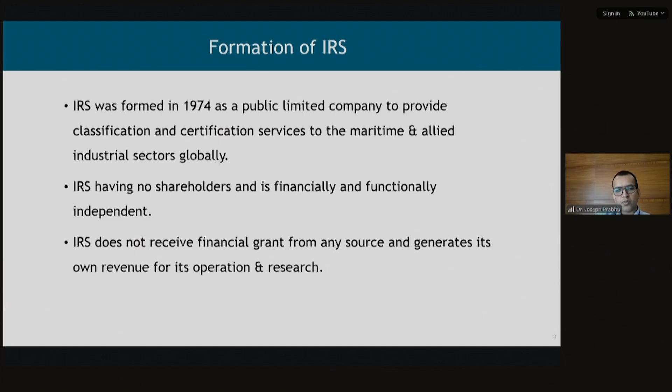We have some recognition from Indian administration, so we can assign load lines to our ships, both Indian and other country flag vessels. We can carry out audits on ships and ports in accordance with international safety and international ship and port facility codes, checking whether ships are sailing as per regulations, pollution norms, and everything else. We have 53 global offices, 26 outside India, and in India we cover almost all the ports.

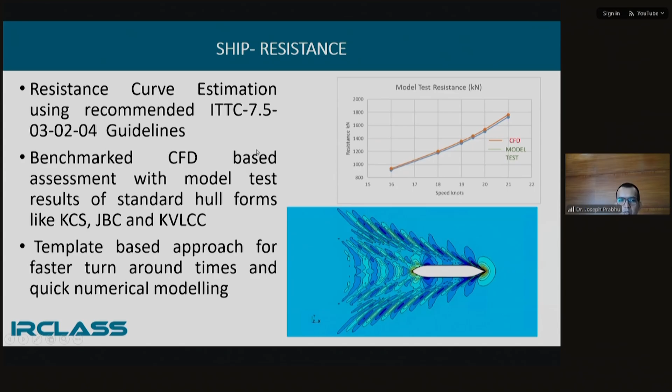What is the resistance? We will have more benchmark studies like model tests, and based on that we validate our CFD results. There will be template approaches for that. We follow ITTC - International Towing Tank Conference - guidelines, including domain dimensions; how much domain we need to take is given by ITTC, so we can follow that easily, ready-made.

Now open water efficiencies, as I already talked about some things - we keep behind the hull removed from the ship and just rotate the propeller. This will be single phase, only water, fully submerged, and we rotate the propeller and compute the thrust, torque, and the efficiency of the propeller.

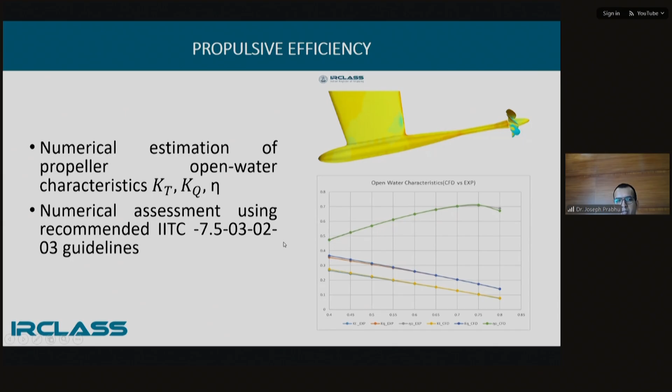Rigid body method and moving reference frame, MRF and RBM. In RBM, we physically rotate the propeller and compute the forces, then transfer that force to the hull, and the ship keeps moving to overcome the drag. In MRF, moving reference frame, we keep the propeller static and make the flow around it, with fluid particles rotating in that domain.

So these are two techniques. MRF approach gives quicker results and is computationally less expensive, but the RBM technique is time consuming and computationally more expensive. So for simple cases where geometry complexity is less, we go with RBM, since RBM is more accurate. Where accuracy doesn't matter, we go with MRF.

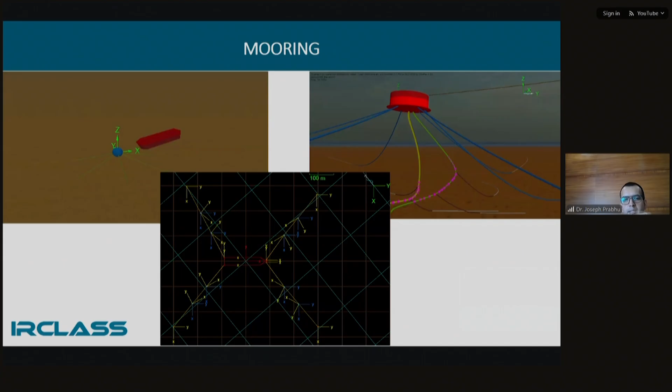Then these are the mooring analyses, which we do in Moses to compute how floating platforms should be moored. When ships need to be in static operations, mooring analysis is done and tension in the mooring lines needs to be checked using Moses. Then we already discussed a little about radar cross sections.

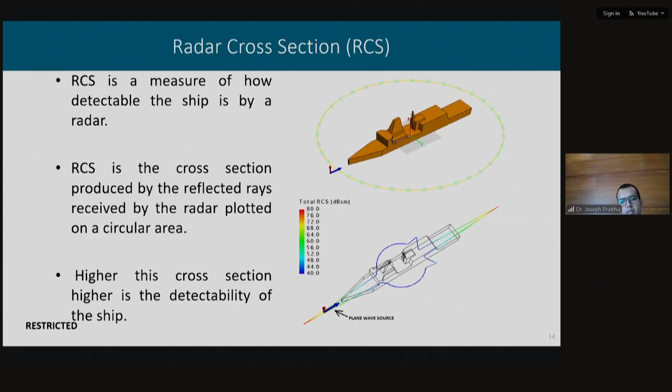This is normally applicable for naval vessels. We need to make the ship less exposed, it's a measure of how detectable the ship is by radar. RCS is the cross section produced by the reflected rays received by the radar, plotted on a circular area. We regulate this in Altair FEKO software, passing radar rays at all 360 angles to find the exposed area and which angle is more exposed. Our main aim is to reduce this RCS signature, making the body geometry less reflective, or the radar ray should be absorbed. Higher cross section area means higher detectability of the ship.

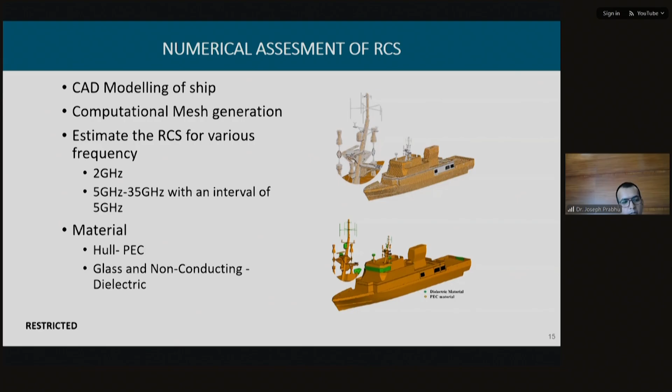Then hotspot identification - which part of the ship contributes to the highest mean of the RCS. Based on the geometry, it will give us the hotspots, so we can work on that particular area and reduce the RCS.

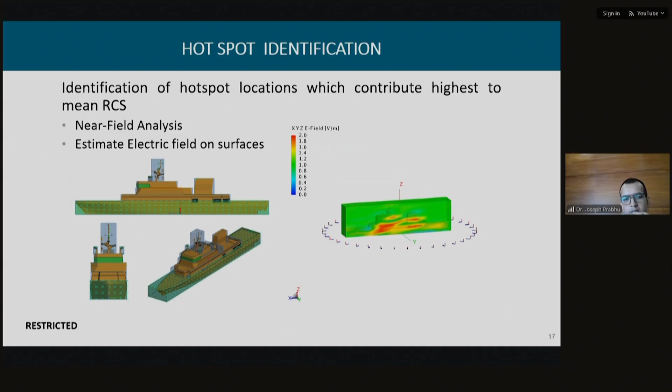So how can we minimize this RCS effect? We can target it by shaping - the shape should be maintained such that it should not be reflected back. And deployment of screens, application of radar absorbent material, that is called RAM. Active passive cancellation techniques will be there. Then surface treatments.

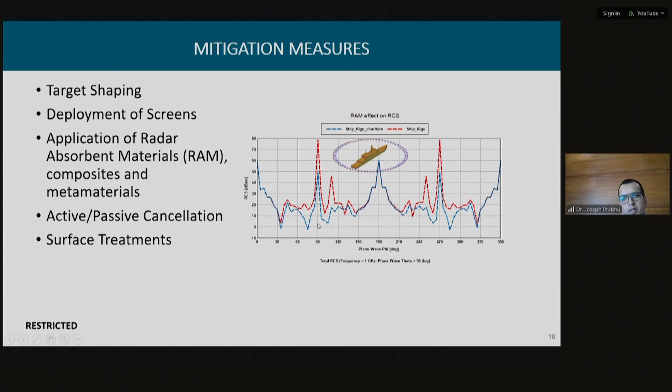The static magnetic signature - this is actually whenever a ship or big mass of metal is crossing the ocean, it disturbs the Earth's magnetic signature, and that is sensed by mines underneath, hidden by the enemies. So it gets triggered based on this disturbance of the magnetic fields.

Sea mines are the major threat to vessels operating in littoral waters, and the electromagnetic signature which governs susceptibility to sea mines is predicted based on electrical conductivity and magnetic properties of the hull. The effect of equipment weight and vessel motion can be accommodated in advanced studies, but currently we are not doing that - weight and such activities cannot be computed in our present software.

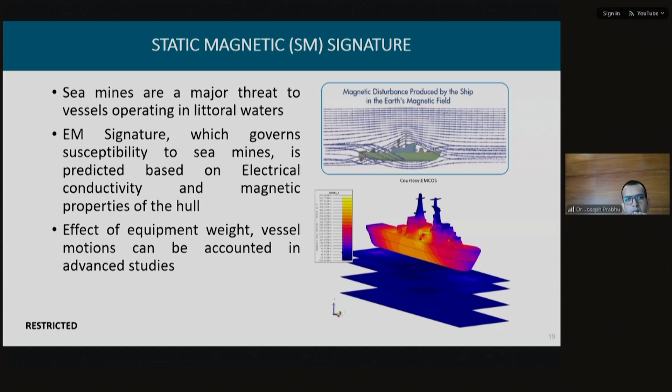This can be minimized by placing certain elements, which you will see in upcoming slides. So for numerical modeling of this, first we need to model the hull, and the propulsion plant - everything needs to be detailedly modeled, and then we can find out the electromagnetic flux.

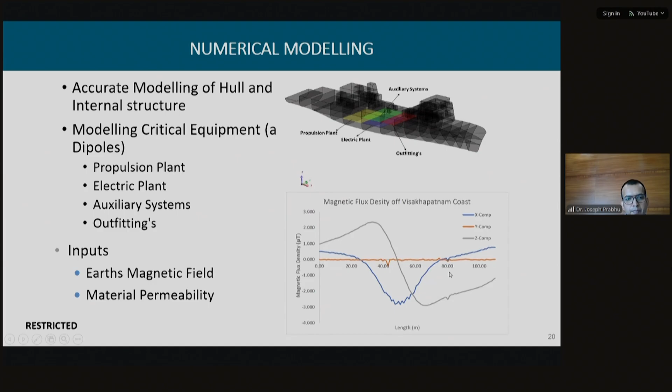You can see both in X, Y, and Z components the electromagnetic signature along the length of the hull. So how can we avoid these things? By making coils lengthwise, horizontally, and transversely. By keeping these coils and counteracting that electromagnetic signature, we can nullify this effect, such that this signature will not identify the mines beneath.

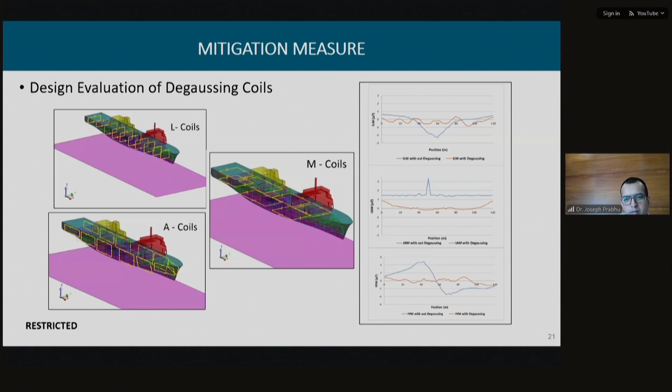With that we are completed with the RCS study, and now we have some specialized analysis for naval vessels - that is airwake analysis. Here the flow will be only single phase; we will consider only the portion above water. We will take it as a single phase, blowing only air at the top and computing the airflow along the cross section of the ships.

First we will be having a model test - we will do the model test in some of the facilities available in India, and we will validate it with our CFD. Then we will proceed further.

The main motto of this study is we need to find out the safe helo operating limits - what will be the operating limits of the helo landing, since the aircraft needs to be landed in this helo region. So for that, what will be the safe operating limit - that will be designed.

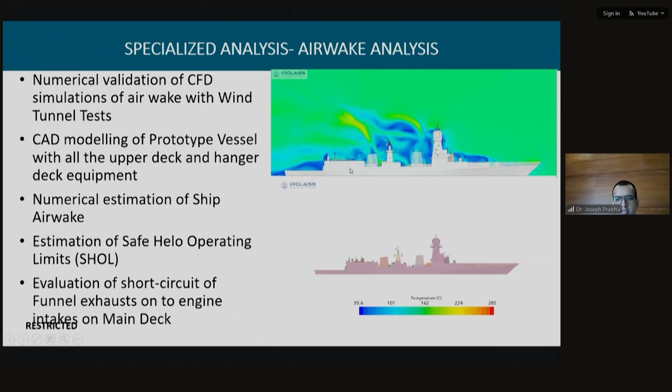Any short circuit of the funnel - there will be plume coming out of the funnel, and that should smoothly pass away behind it, and should not enter into any of the engine intakes. That should also be monitored.

So this is the wind tunnel modeling test - first this is a 1:50 model of our vessel. This wind tunnel facility testing will be done at IIT Kanpur.

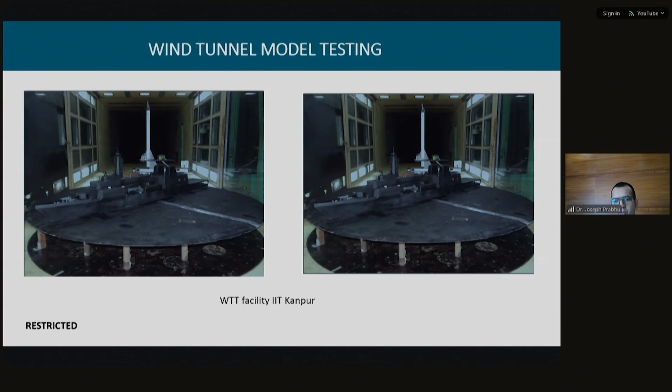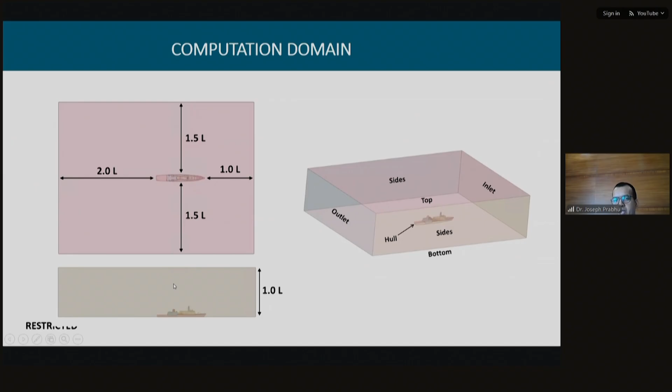This will be the computational domain - it will follow one L length forward of the ship and 2L behind, and along the sides we'll make 1.5L, and at the top we'll make 1L. These are the domain dimensions.

Then observation planes. We will be having vertical planes, horizontal planes, and transverse planes as in the images. The helo is our main focus, so we'll be making a few planes in that helo region, both vertically, horizontally, and transverse-wise, and we'll be measuring all three components U, V, W of the velocities.

Wind tunnel testing is very expensive, so we can't do all the tests there. We'll do a few tests internally and validate with CFD to fine tune our model for proper mesh count and proper turbulence model.

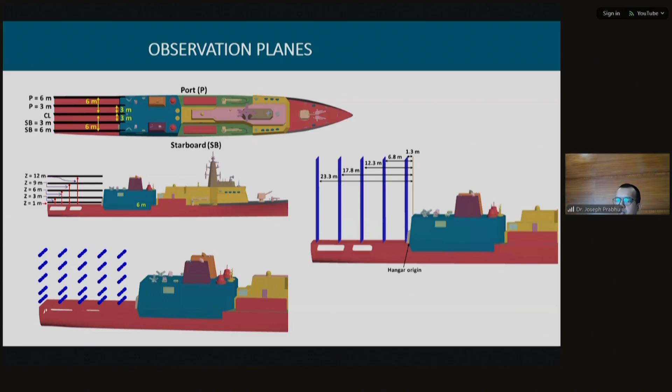Then we'll run for all the oblique angles of the headings.

In CFD, this flow tends to be highly unsteady, so for some iterations we won't get a match. We need to find the right iteration, checking it and using that frame for validation purposes.

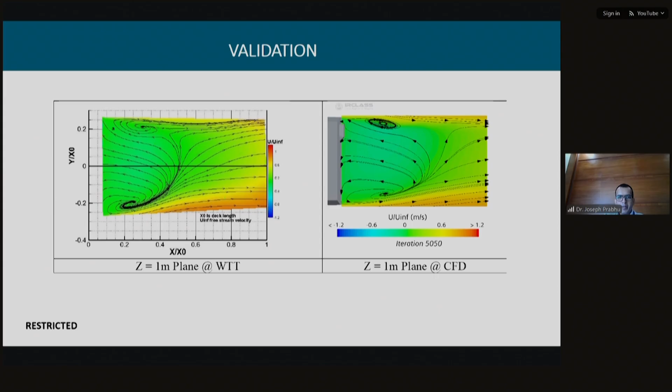Then flow separation zones need to be computed in the helo regions. This is important when a helicopter is trying to land behind these structures. Any flow coming in and any circulation causing reverse flow can be dangerous, and you may have seen many accidents happen while helicopters are trying to land.

Landing is a very tedious process for the pilot to do properly on the helo deck. The main issue is that due to these circulations, if there's some sucking flow, the helicopter might get pulled and crash into the hull. So to avoid that, this study is made to find out at what zone the circulation occurs, and if it is severe, we need to avoid those conditions for landing.

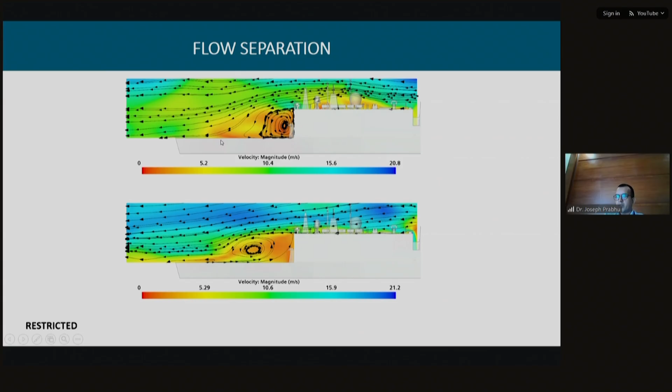So this gives the safe operating limit, which needs to be prepared. ALH is one of the helicopter's names.

First we will compute various planes. So Z equal to 1, from above the helo deck level, at 1 meter height, 3 meter height, and various levels, we will be computing the velocities.

We'll check further if the velocity is at headwind, crosswind, or tailwind. Three things need to be said: headwind is wind coming from forward, crosswind is 90 degrees, tailwind is from behind. So we need to check this.

If it is exceeding, every helicopter has its own capacity and limits, so we need to check further. If it is exceeding beyond that, we mark it with red to show the limit is exceeded, and that particular case needs to be avoided.

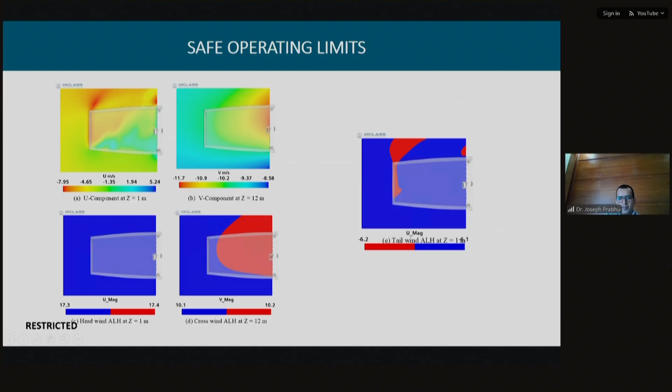Then temperature at critical equipment. Some equipment placed on these ships may be very critical, such as sensors and radars. When our plume comes out of the funnels, it passes over and heats up this area, and the sensors may be affected and may not perform properly due to this.

So we perform a plume analysis as the plume exits from the funnel, and it should pass smoothly from the beginning. Due to some circumstances or wind flow at oblique angles, it can get pulled back and hit the mast, increasing the risk of damage to the sensors. This needs to be studied.

This needs to be studied for various flows and various oblique angles, and we need to plot accordingly and check the temperature. Every sensor's limitation needs to be noted and checked like this.

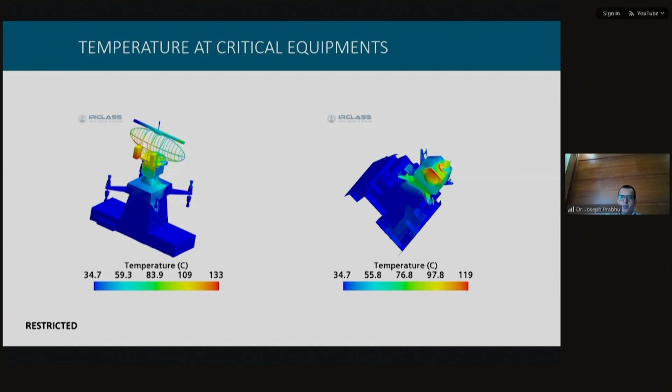That is heating up our sensors, and there will be intakes also for the engine rooms. Engine needs to intake air, and exhaust will go out. Sometimes this exhaust will circulate and again go to the intake. That reduces our engine performance and is bad for engine operations, so that re-entry needs to be avoided at any cost. That is the purpose of this plume analysis.

Another thing is this plume will be exposed at high temperatures. As naval vessels need to be, the signature should be kept low when operating at other enemy territory, so we need to reduce the temperature. Temperature needs to be monitored. If operating at risky zones, we should not be caught by the enemy, so our signature should be kept low and temperature monitored. If the temperature is higher, we need to use some other measures to keep it low.

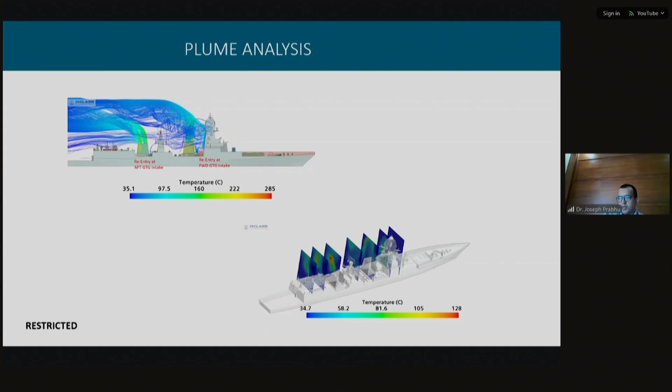For that purpose, as seen in the below image, we are measuring the temperatures along the cross section planes. We also do some infrared signature studies. Based on that, engine room temperature and everything should be minimized.

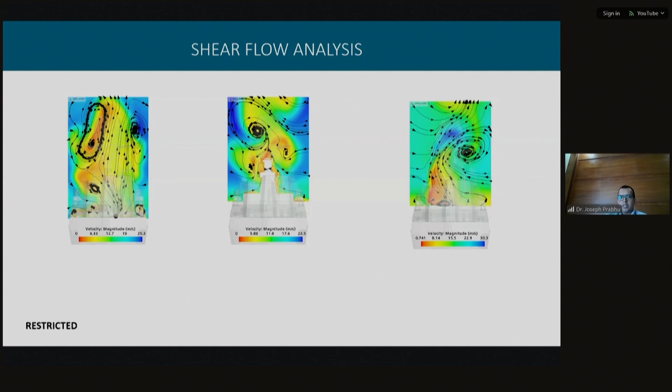So we need to do this for various angles and various speeds. It comes with a matrix of cases to be run in CFD, like various headings, every 10 or 15 degrees rotating - 15, 30, 45 degrees, like that, oblique angles rotating. We also increase speed variation - 10 knots, 20 knots, 50 knots, like that. Various speeds are tried out and computed to find which cases need to be avoided, and finally we list out what cases need to be avoided for operations.

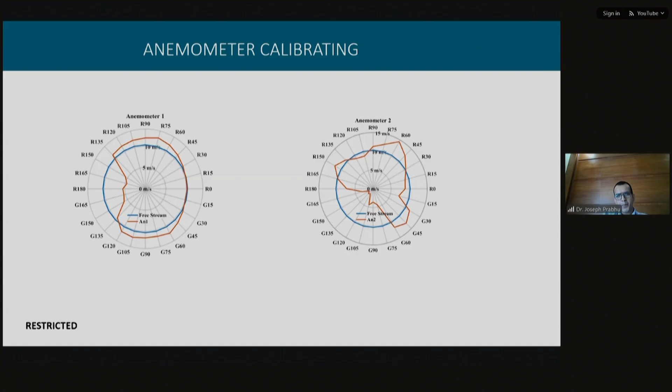There's one question in the chat. They were asking how did you model the movement of the ship? There are 2-3 ways to do it.

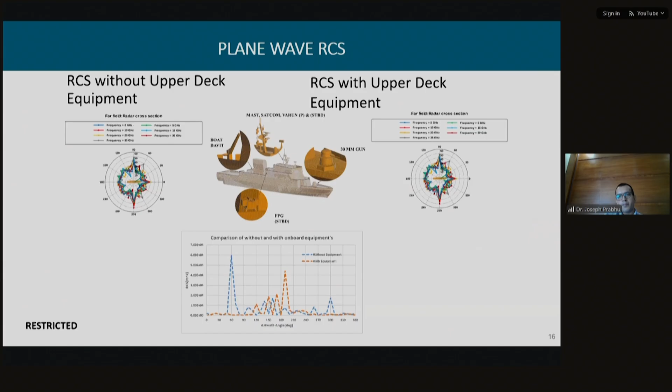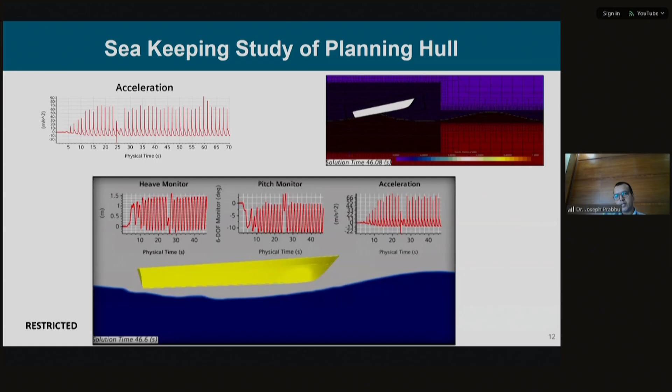So that will be moving into another computational domain. This is for seakeeping, where we use the sliding mesh technique. For normal resistance and other analyses, we won't move the ship. The ship remains fixed as a rigid body, and only the flow will be simulated. Is that true? Yes, sir.

Thank you, sir. So currently in OpenFOAM, we can do resistance and even open water analysis. I am currently working on how to find self propulsion and other things. We also work on Helyx, which is an open source tool. They have a GUI based version, but if we want GUI, we need to pay for it. Script based, we can use Helyx freely. Other things normally take longer, and our work may need daily new variations, so for quick solutions we'll be using STAR-CCM+.

So those who are students, you can reach out to me. If you have any questions, you can talk to Payal madam, and she can communicate with me. You can work if any students are interested to do projects with us, collaborate. I am ready, and our organization is ready to welcome you. We are located nearby, so it will be easy for commuting.

You can consider a BTech 6 months project or something. Any one of the projects we can develop in the form that we already discussed with Filemon. So any students or anyone interested, we can offer a paid internship also.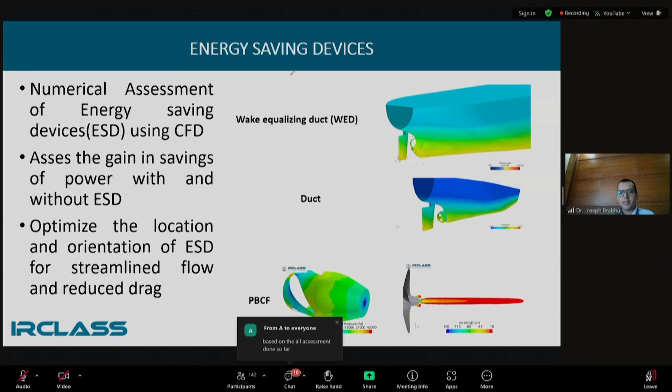So there's one more question in the chat. So, what are the optimized locations to place an ESD?

Normally fins will be there, at mid hull, from mid hull to till 70% of the hull. Stabilizer fins will be kept there, which will make the flow steady. That is one of the things.

Then wake equalizing duct, which will be forward of the propeller, and a propeller boss cap fin will be there. In front of the rudder there will be one cap fin. Behind that, it will be linked close to, not touching, but it will take the flow from the propeller. That is the boss cap fin.

So how we design these depends on the current geometry of the hull. The current geometry of the hull goes to old vessels, so we can't do much modification to the hull itself. Based on the hull, we look at how the flow is coming to the propeller, and then we try.

We try all the variations and determine which one will be better. For some ships, propeller boss cap fins may serve the purpose, kept behind the propeller. Some may keep a wake equalizing duct to regularize the flow. Like that, we can try it in CFD and find out which is the optimized way, and which one we can keep.